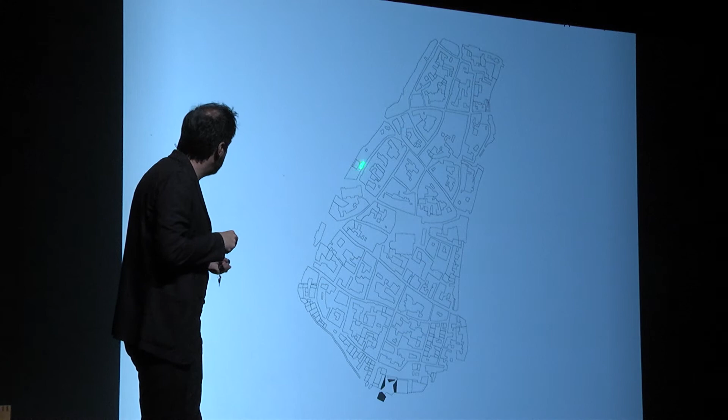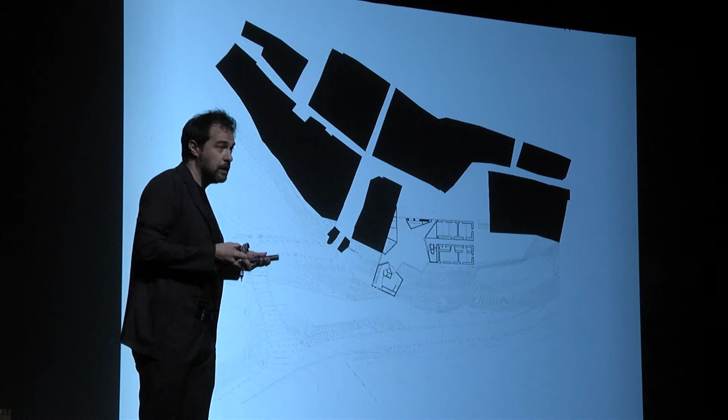The project is placed in a small town, just at the limit of the urban area. In a way, this specific geographical condition has marked the project. The project is an interpretation of this condition, a singularization of this duality. From one side, the project starts to recompose and finish the urban tissue, and from the other side, as we will see, it tries to establish the limit of the urban in front of the natural landscape. So this duality that came from a geographical condition has marked the design of the project.

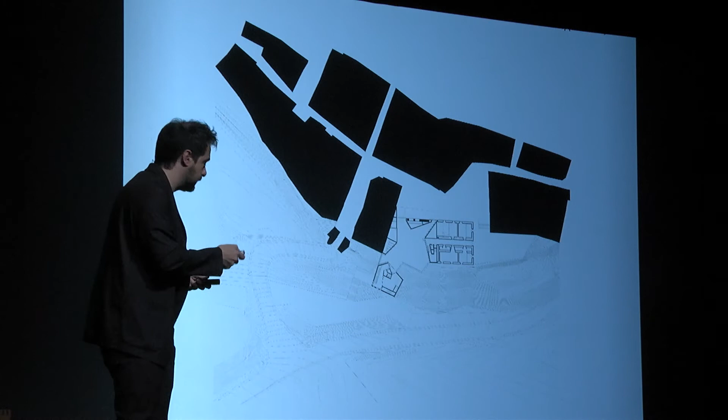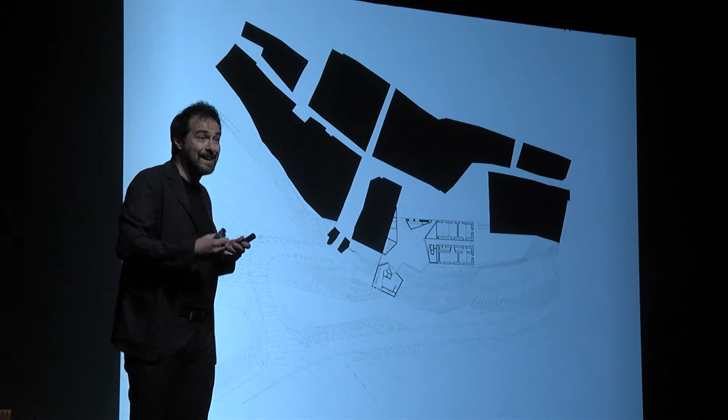From one side, with this small element, it's something very sensible to the context, and from the other side, with this archetypical element that we will see is a tower, it tries to establish another type of relationship with the landscape. So when we see the project from a distance, it is just an archetypical tower that, as I say, marks the finish and establishes a clear limit between the urban and the natural landscape.

It is an autonomous element. You have to imagine that this landscape is an old landscape, very flat, a natural landscape where small towns appear with medieval towers and so on.

And so, but if we go closer to the building, we start to discover that, in a way, the tower is not alone. It's not just an independent object placed there, but it's raised from the pre-existing element that hosted these offices for this company before.

There is a very small link with the pre-existing. And if we continue, we start to see how the building wants to be specific for this place, but at the same time it is something more autonomous. This image, for me, is quite relevant and important, because it's a visual translation of this contradiction, this dichotomy I mentioned before. On one side, the building is something autonomous, independent, conforming to its own internal rule, but it arose from the pre-existing one in a way.

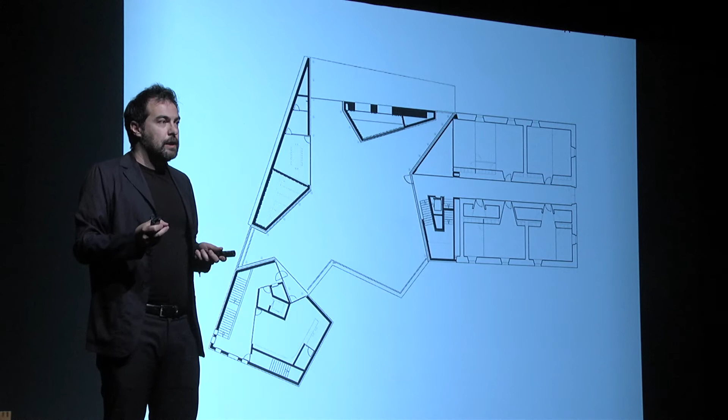So it starts to be specific for this site. In a way, it starts with this joint. It creates here a plaza, a platform, and then it became more and more independent. The tower contained the most important, more representative program, and the basement holds the other offices and so on. But what is also very important in this project, and also in the other project we will see, is that all our projects started with a reflection about public space.

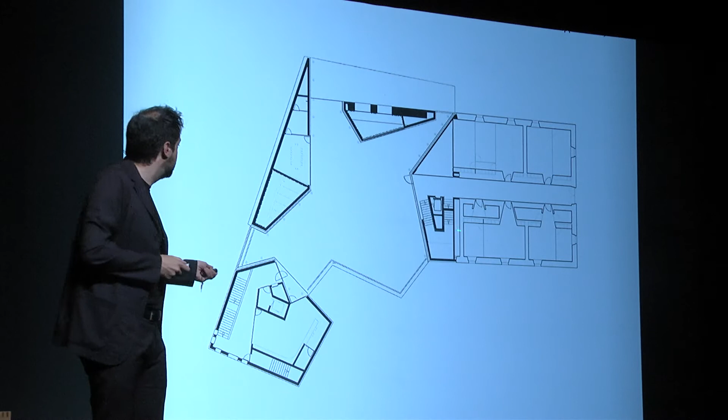Here, for example, this drawing represents the main level of the building. In the middle of the project, there isn't a building, but there is a plaza. In the middle of a private building, there is a public plaza. So in a way, the architecture is just the frame of the urban.

And this image that represents this plaza is, for us, like a manifesto. What is important here is not the architecture in itself, but what happens in between the architecture. This central void, this public void in the middle of the architecture, gives meaning to the building. It's a private building, but it's able to return something to the city. So in a way, in this project, and others of ours, the architecture is just the frame of the public space. And we try to work in a very essential way.

Here, for example, there is just one material, the stone, that covers the entire building - the floor, the walls, the roof - and we try to create something more monolithic, something also primitive or basic or archaic in a way. And in this plaza we also try to establish a kind of balance between a more intimate space here and the openness of the landscape.

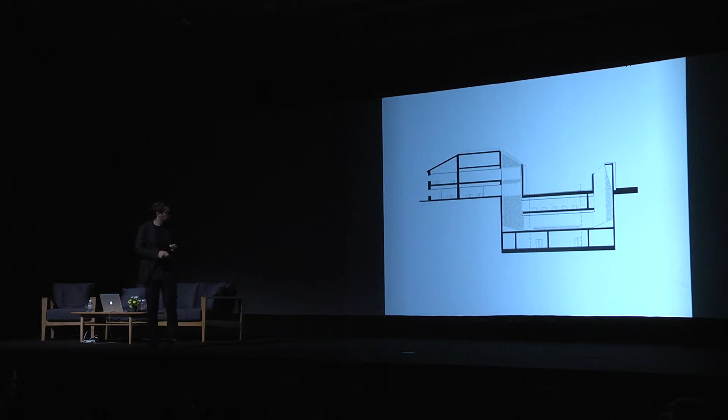So every project has a small secret in a way. We try to focus our attention on how to create public space, and discover how to organize the program in order to have the possibility to create that public space. This is an image of the lower auditorium with this big skylight.

We spend a lot of time discovering which type of materiality the project should have in order to establish this intimate relationship with the context. Here, for example, the building is in stone, the same local stone of the previous building, in order to give continuity to something, and transmit the same gravity, the same solidity of the original building.

You have to imagine that with the passing of the years, the building will transform, and step by step it will be more linked with the original one. Here it's important to notice that this facade is not built with a ventilated facade, but we forced our client to conform the building with a real stone facade in order to transmit the same gravity or mass as the original one.

And speaking about the materiality means also speaking about time, discovering how the building could transform over the years. So it's a way to control or reflect about what time means in architecture.

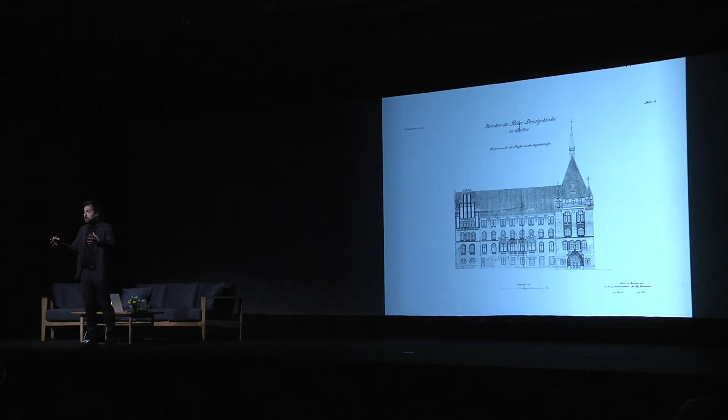When I speak about specificity, I want to say that it means discovering how to learn from what exists. This drawing reveals to us what are probably the main identitarian elements of this type of architecture. These drawings speak about mass, speak about verticality, speak about repetition, in a way.

So starting from there, we tried to reinterpret it through an autonomous thinking, because reflecting about specificity means nothing if you don't filter it through your own interpretation. The result of this interpretation is this model, our proposal - a building still speaking about verticality, repetition, mass, order, composition, all the elements that from our point of view were identitarian for this context.

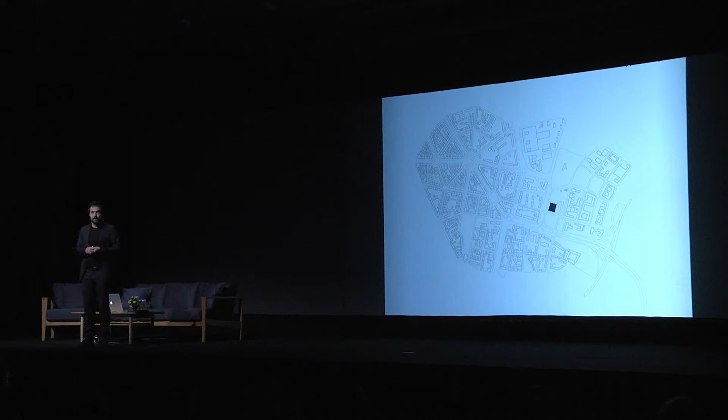The Philharmonic is the first step of a bigger urban renovation of a quarter that is now quite depressed. From an urban point of view, the building just tried to fix a corner, create an urban corner inside a quarter that's quite fragmented.

In this case, the project fulfills the entire site, and the result of our reflection is this image. I can say that all the elements that were in this building, our neighborhood, are transformed and converted into something new in the new project.

The project tries to reflect something like a stark monumental element, very simple, where the only expressive element is conformed by the roof - this very steep roof that conforms the landscape of the city, in a way informs the project too.

But when you design a project, there are many things that happen in your mind. We also tried to establish a kind of relationship with this expressionist condition that's still present in this area. So without any type of nostalgia, we modified the material of the building to give independence to the new project in front of the existing building.

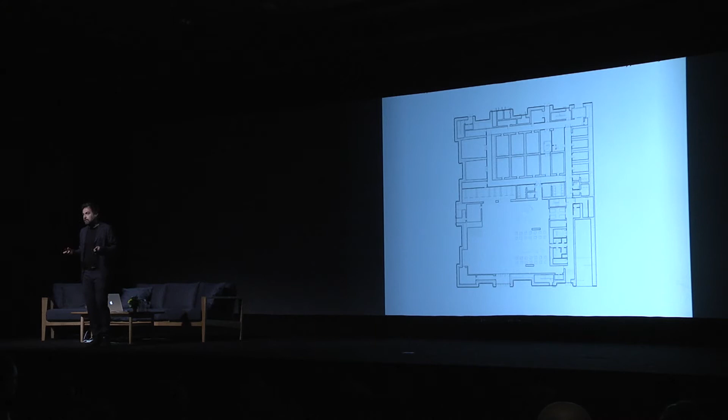Basically, it is conceived like an inner plaza, an inner public plaza. In this case, the relationship with the public space is not outside of the building, but it became inside. This space is conformed by the natural light coming from the skylight, by the shape of the two concert halls, and from the vertical connection element of the stairs.

So in a way, this foyer is a public plaza, because what is important is not the architecture in itself, but what can happen inside of a building. Our work as architects is to give the possibility to the citizen to use the building and transform it, and have activity inside. So in a way, at the end, the architecture is just a background where things happen. And this gives meaning to our work and to the architecture.

So in this project, like the other project, we try to solve a very complex problem with simplicity. There are the two concert halls, two boxes. Inside of this crown, which contains all the technical elements, vertical elements, etc., the interstitial space that appears in between these elements is the public space. So we try to make the project very simple, very clear, very understandable.

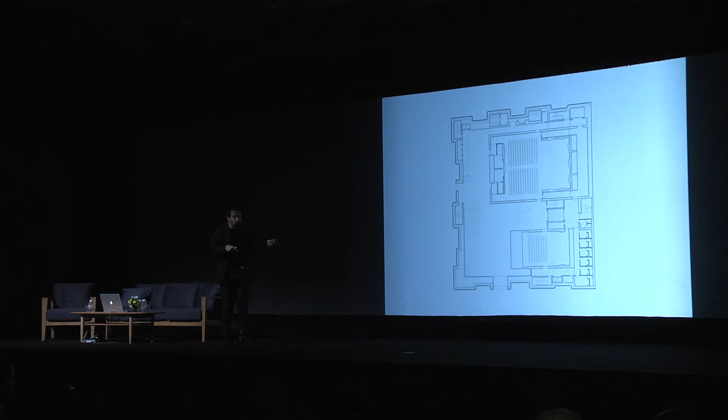And then there are several levels, and on the upper level there is an exhibition area that connects the two main systems, because inside the building there is an internal loop where people can go up here or with these stairs here, move around the building, and rejoin in this area. So it's important that a building of this dimension should be very easily understandable.

This exhibition area is suspended over the foyer here, and you have a visual connection for all the spaces. This permits the visitor to be oriented inside of the building.

But the main program of a symphonic hall is for sure the concert hall. And the challenge was how to design a contemporary concert hall for classical music. So we started to work basically with three elements: the section, light, and ornament. The section is basically a reinterpretation of a traditional, classical typology of the Eastern European concert hall. There is a very flat floor here, and this is the first step in order to transform a tradition into something new.

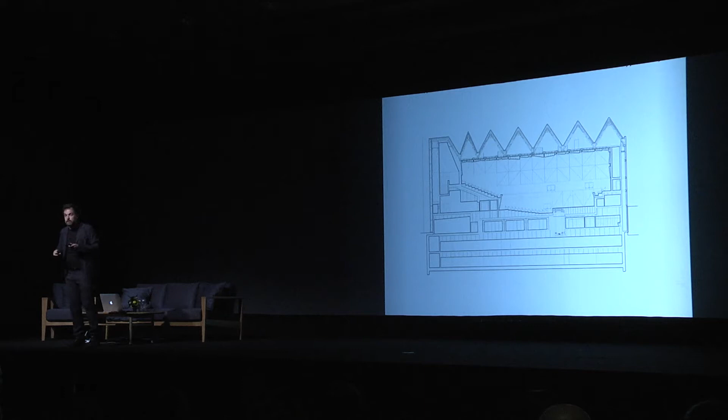But then we discovered, starting with this idea of ornamentation that conforms the classical concert hall, that probably starting with a detail like this, with an ornamental detail, we would be able to conform the entire concert hall. So basically this concert hall is conformed by a decoration or ornamentation on a large scale.

But what is really interesting is this ornamentation is not really just an ornament, because all these surfaces are made like this in order to achieve the best acoustic. They are really a very high-tech element in a way. So if we are able to join decoration with technique, the ornament is not an ornament anymore, it's another thing. In this case, we try to discover how an idea of an ornament is able to create something performative for a building.

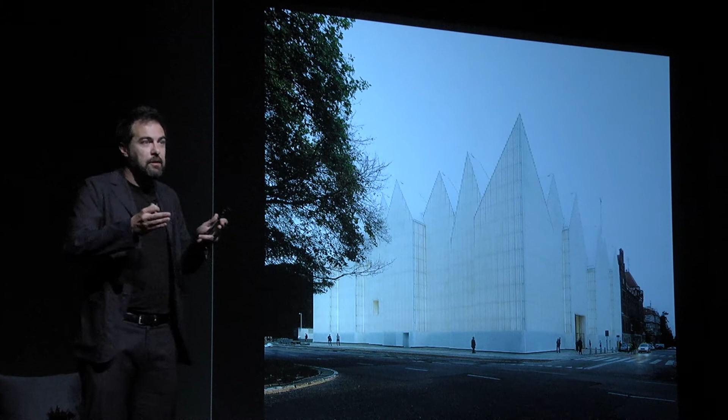And it changed radically because the light is the element that conforms the building. In a way, the building expresses that inside there are some type of activities. So the building, something that was solid and monolithic, it became something else, it changed its materiality to something lighter. During the night, at the end, only the light conforms the shape of the building. And then again, the next morning, the building became more solid again.

So in a way, the main achievement of this project was to create a building able to establish some type of relationship with this very fragmented context in which it's placed. In this image, probably you can start to feel how the building is related with the other elements that appear in this part. But at the end, the great success of this building is not the architecture in itself, but fortunately this building has been very well received by the citizens there, and now it is really a new social cornerstone of this city. And for a public building, that's the main goal, I think, in a way.

Recently, last summer, we finalized a fine art museum in Switzerland, in Chur. Chur is a small town close to Zurich. The project is an extension of an old building, and this image represents the actual museum. It's a building quite weird, a little bizarre, but very interesting in a way. It is a neo-Palladian building built in the 19th century. It's influenced by the Rotonda, by Palladio, but there is also a strange oriental ornament that appears here or there.

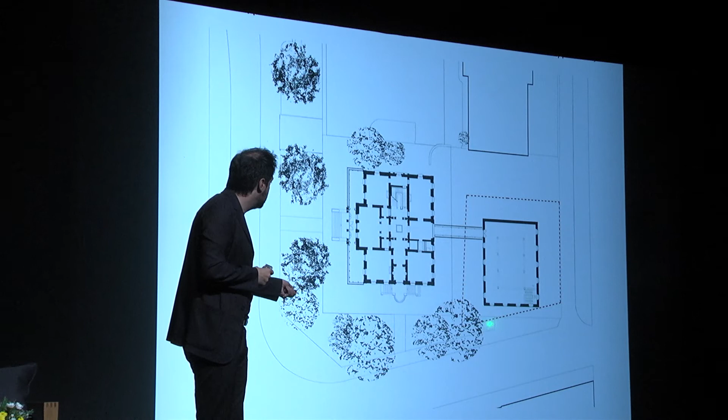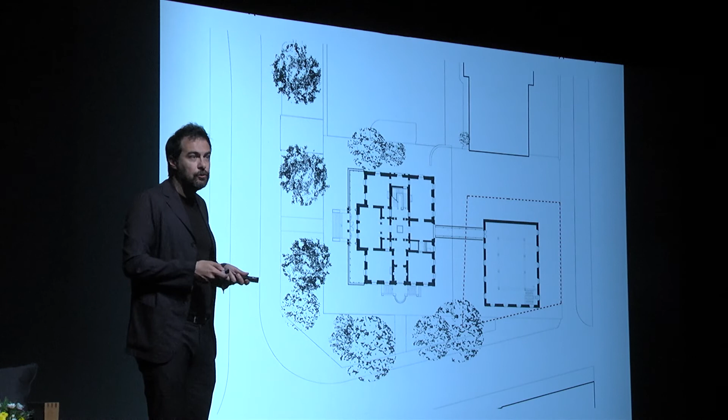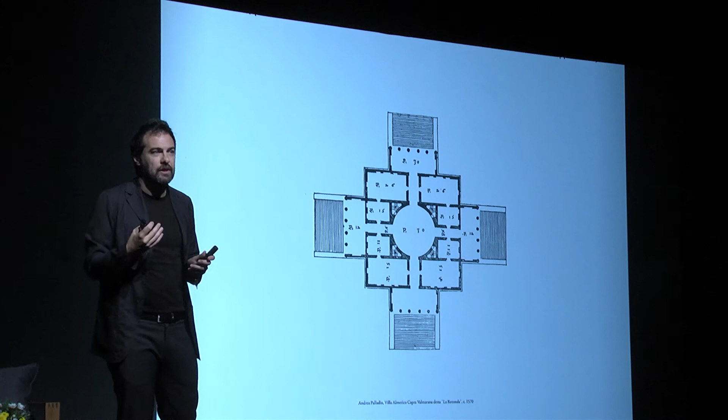The competition that we won was very, very complex because they asked us to place a very big program inside this site. Here you can see the conformation of the historical building based on La Rotonda. The condition of the original building was very important for us. This idea, the Rotonda by Palladio, this idea of an absolute building, was important for us in order to discover how to create the new building.

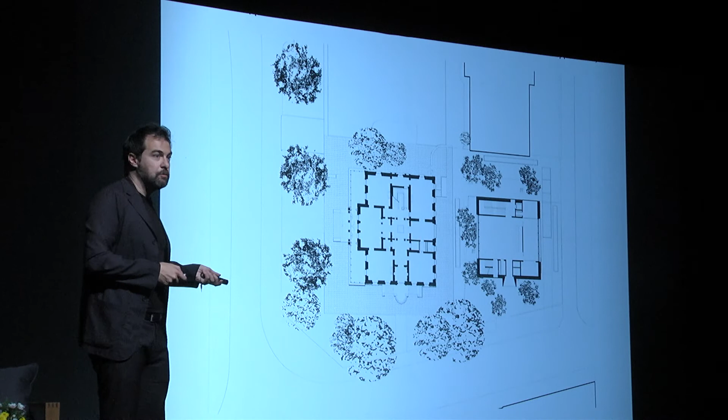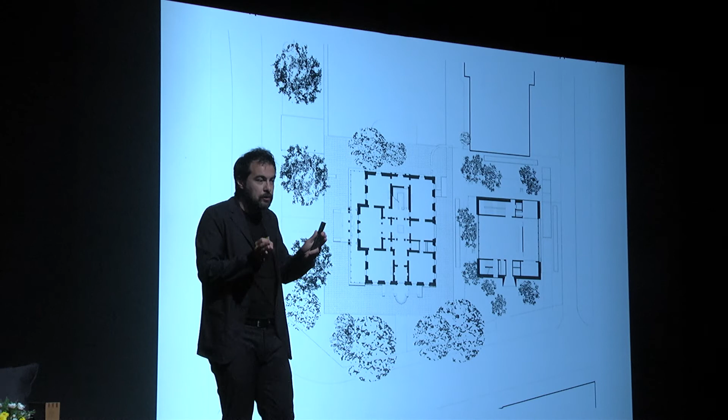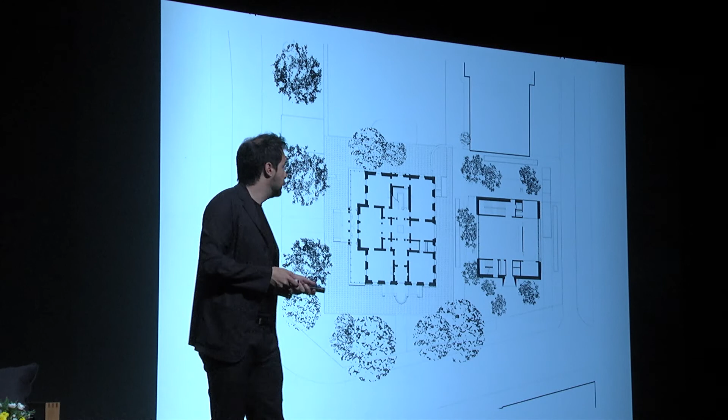So what we did was very, very simple. We just extracted the axes from there, imported them to the other building, and tried to make a very simple project, super simple, very small, in order to also use the garden around the building, and try to make the garden also around here, in order to use the garden as a link between the two buildings.

So in a way, what we try to do is create a diptych, in a way. This is a painting by Piero della Francesca where in the same painting there are two faces - one is the man and the other is the woman. Each one has its own personality, its own autonomy, it's something independent, but both together they conform another element in a way.

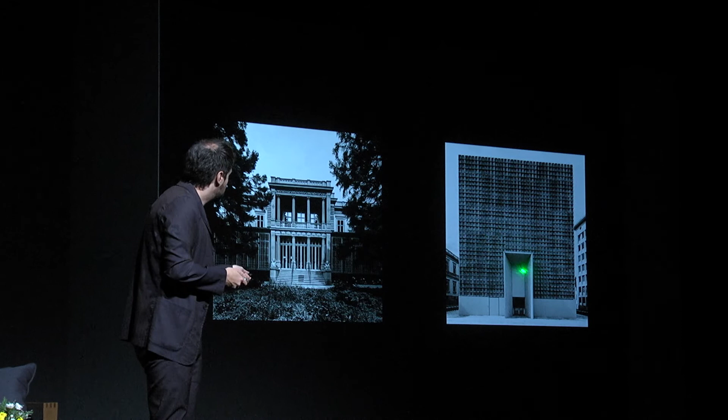So what we try to do is exactly the same. We try to create, in a way, a diptych. The same identitary elements that appear in the original building are transformed into the new addition, in a way. Each one is an autonomous building, but each one is conformed with the same conceptual elements. And again, the building, in a way, is something super specific for this condition, but it preserves its autonomy, as I said at the beginning of the lecture.

And which are these elements? I can say that our project, in a way, is a neo-Palladian building, because as we see, the plan is conformed by a repetition, a very regular sequence of rooms, in a way. It's conformed by a double symmetry, that comes from the original building.

There is this kind of bas relief that conforms the facade, creating an ornamentation, and it tries to create a subtle link with the decoration that conforms the original building. So for this reason, I can see that the same conceptual elements of the original one are conforming also the new project.

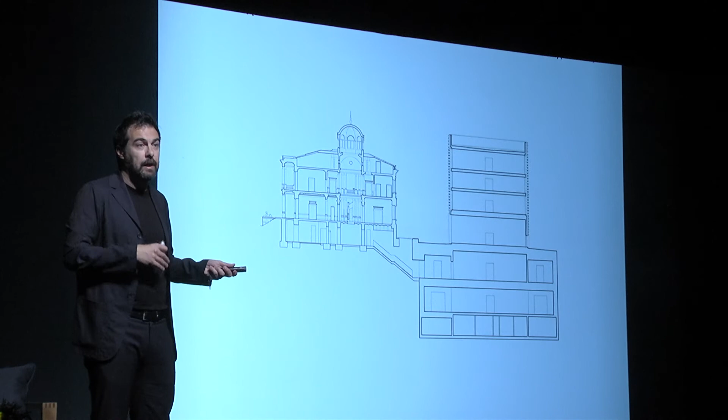In order to conform this public space, we took a very radical decision. We placed all the exhibition area underground, and we let only the public function use the outside area. In this way we were able to reduce the size of the building, reduce the footprint, and give importance to the public area. The connection with the historical building, with the exhibition area made by Peter Zumthor, happens here with these stairs.

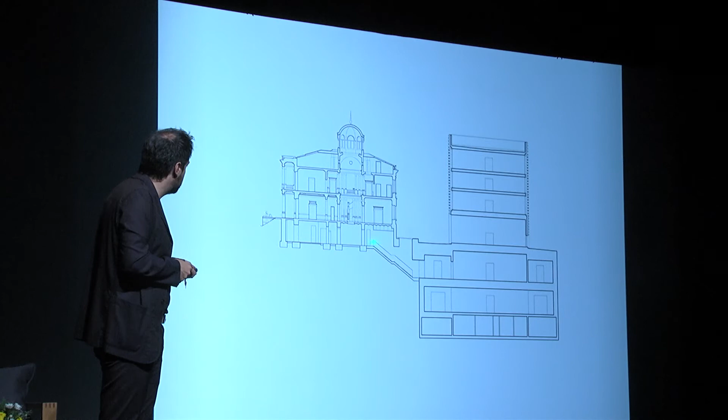So the foyer is again a public area, and the relationship with the historical building is quite evident. The facade of the historical building is the facade of the new building.

What is also important to know is that this area is the foyer, but at the same time it is the delivery area, because a truck can enter here. And for the art, there is a big elevator here. So we tried to combine the program in order to compact the building to the maximum.

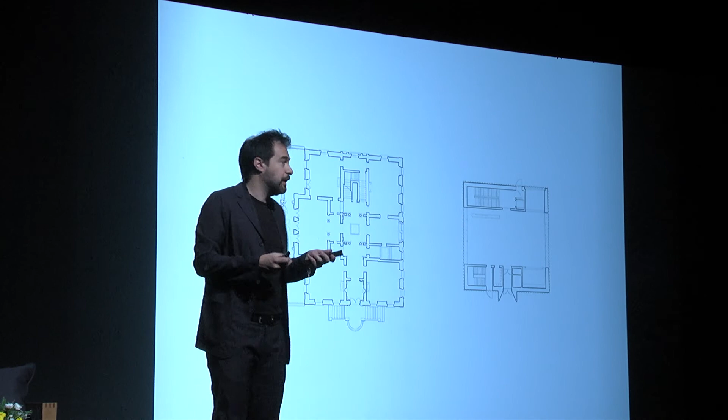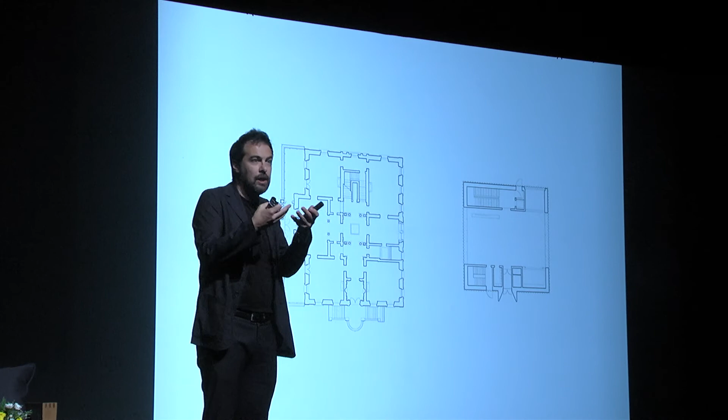This simple drawing, which I personally love, is I think one of the most synthetic, basic, elementary drawings we did, because everything is here. The building is composed just by the structure. The structure contains the core, contains the elevation. The composition of the building and the structure are the same thing. So it expresses our effort to be synthetic, in a way.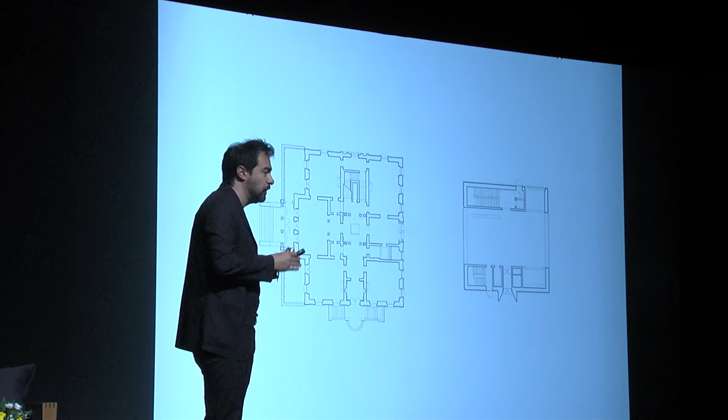This plan and this plan are balancing, in a way. There are these stairs, this element, the portal hill. Everything is simple but quite clear. Here, this is the stairs that go down. This is the first floor underground. The museum is in concrete.

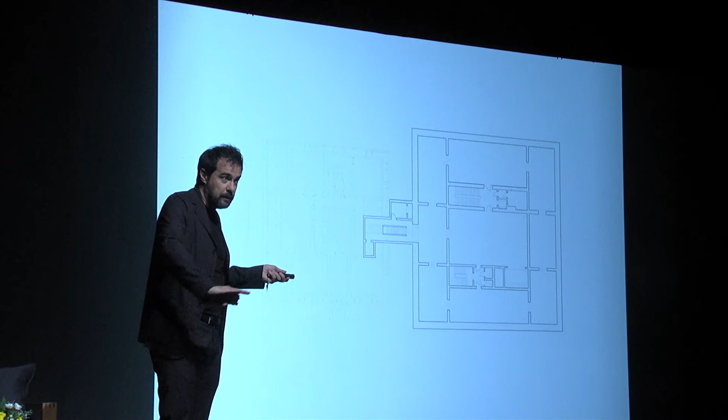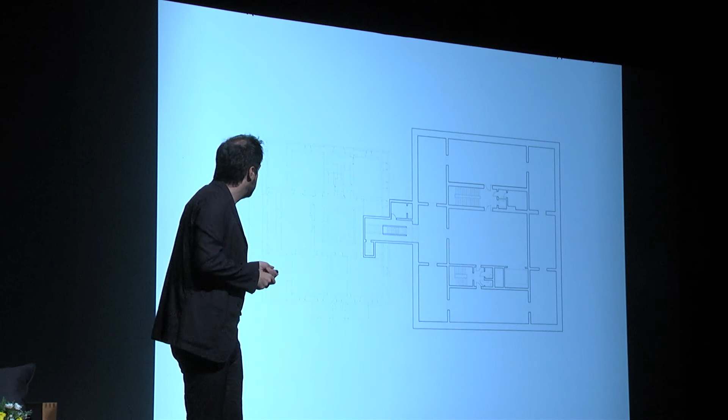And here is the plan of the first floor. You see that basically it's composed of a sequence of rooms, in a Palladian way. And there is a loop to visit the exhibition here. These are some images of this museum, which is basically devoted to contemporary art. This is the connection to the other building.

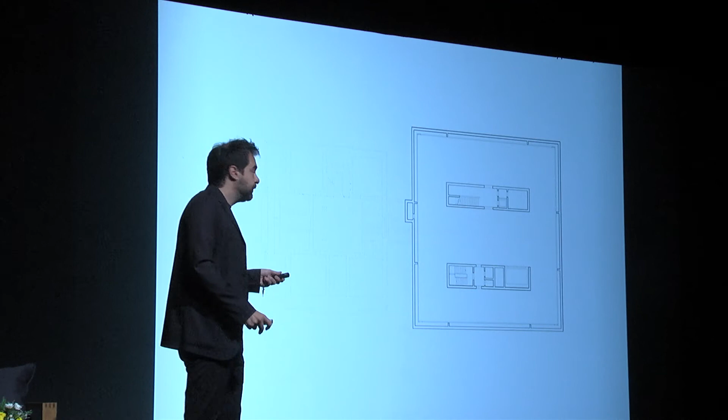But in the second floor, again, you see how a complex program is solved in a very simple way. There are just the two cores. This space is for temporary exhibition, very open, and that's it, there's no more. But the precise position of the core of the structure permits conforming the entire program with simplicity.

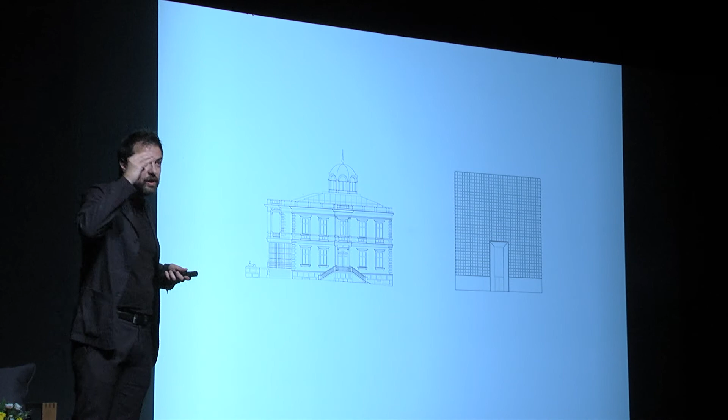This is, I think, an important achievement of this museum, impossible to tell you just with the image: when you visit the museum and go down 20 meters underground, you don't feel that you are underground, because of the proportion of the space, the dimension, the central circulation. I think this was the most risky part of the project, but if some of you have the opportunity to visit the building, I think it's an important achievement.

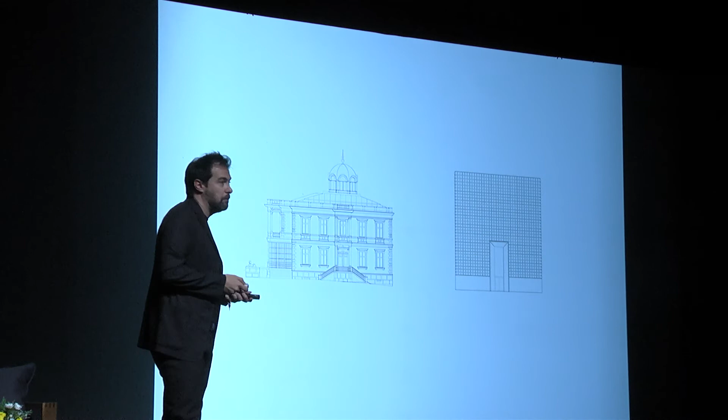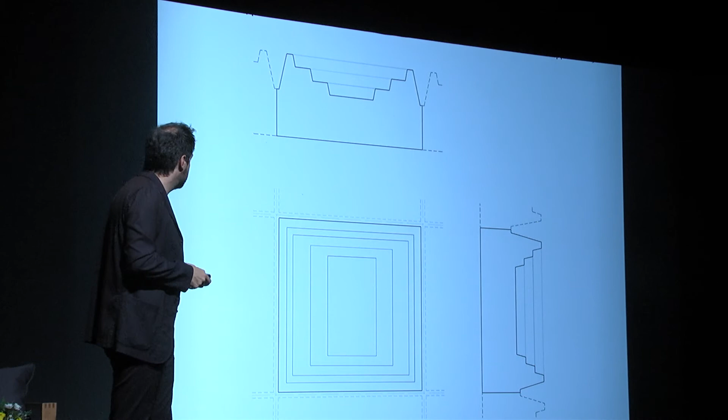So we also, the materiality of the building is absolutely important. The facade is composed by a sequence of this element in concrete. There are prefab concrete elements that conform the entire facade.

But you have to notice that when I say that for us it's important to discover how to work with specificity, it's not only to reflect about the form, but it's also important to discover how you can work in a different context.

For example, the Philharmonic in Szczecin is basically a handcrafted element, because in Poland there was a tradition, there still is a tradition, able to conform this handmade element. So the concert hall is basically a handmade element.

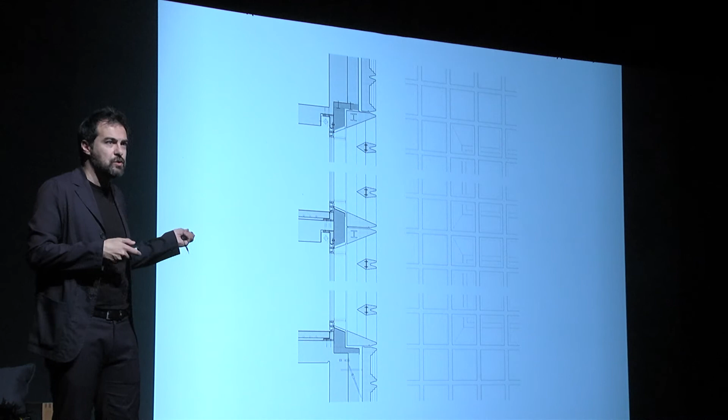But here in Switzerland, there is high technology with concrete, with prefab concrete, that permits us to achieve this type of facade, where with the concrete we are able to make edges with only 1 centimeter. So it is important also to interpret how you can work in different conditions.

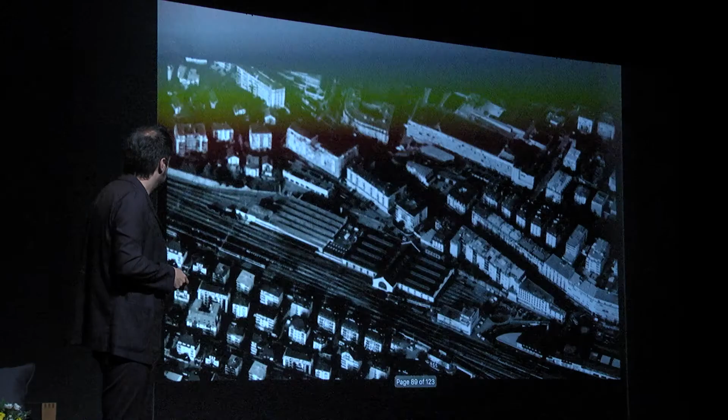Now, actually, we are working also in another museum in Lausanne, again in Switzerland. This project is very different from the other one. The site is very huge, it's all this area, close to the railways here.

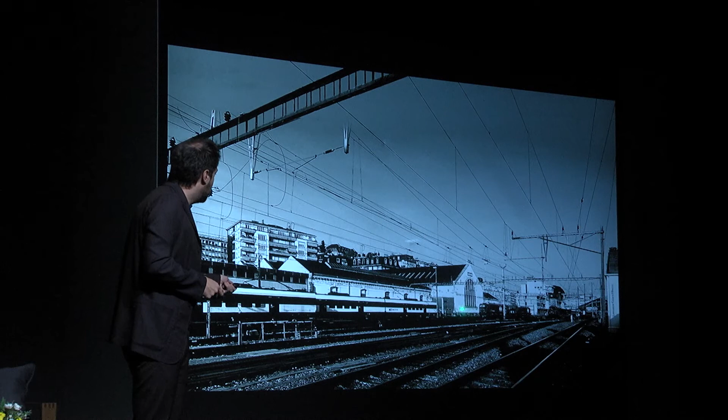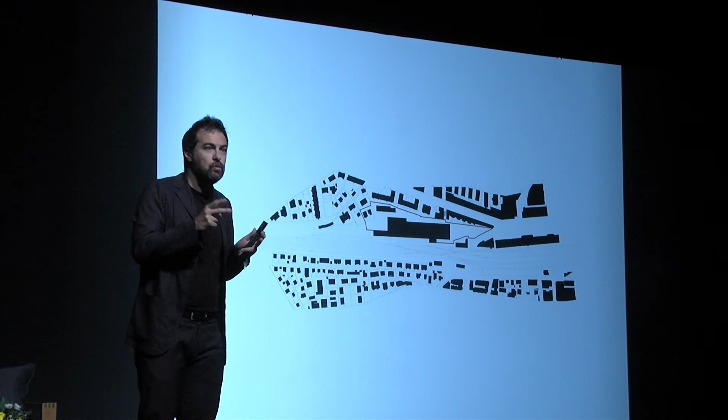We spent during the competition a lot of time discovering how to transform again the historical building into a new museum. But at the end, after a few months, we discovered that probably in this case, this strategy was not so good.

We start to discover that, again, before thinking in architecture, it was important to discover an urban strategy able to create public space. So we start thinking that probably what was important in this project was to combine urban and architecture.

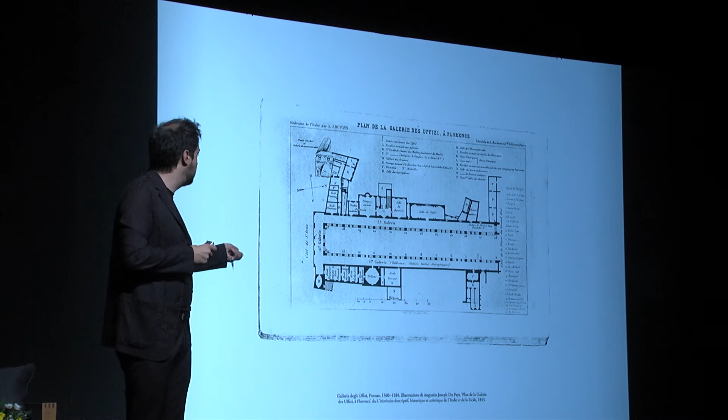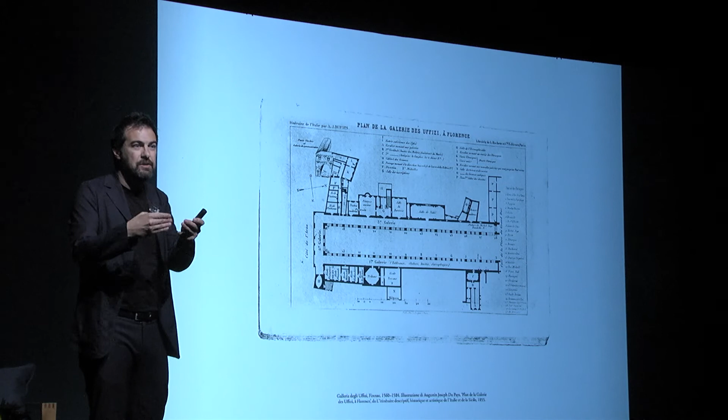Like, for example, in the Uffizi. This is a plan of the Uffizi Museum in Florence, where the architecture and the urban and the plaza in the middle are the same. There is no difference between architecture and urban.

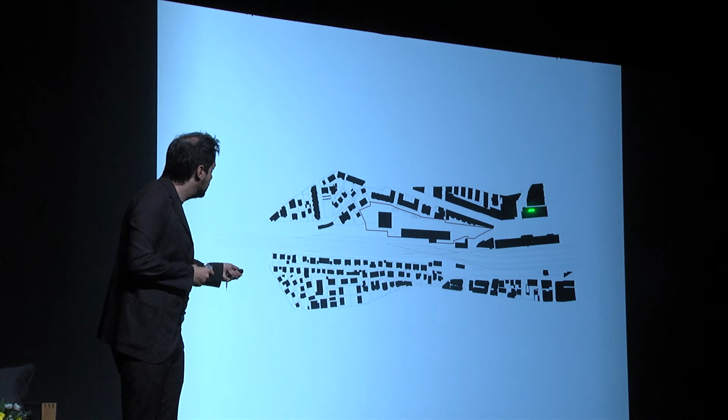So we took a very radical, sober, but at the same time radical decision. We decided to demolish a big part of the original building in order to create this new big plaza, able to connect this area with the plaza in front of the rail station, and in this way try to conform this new site linked with the city.

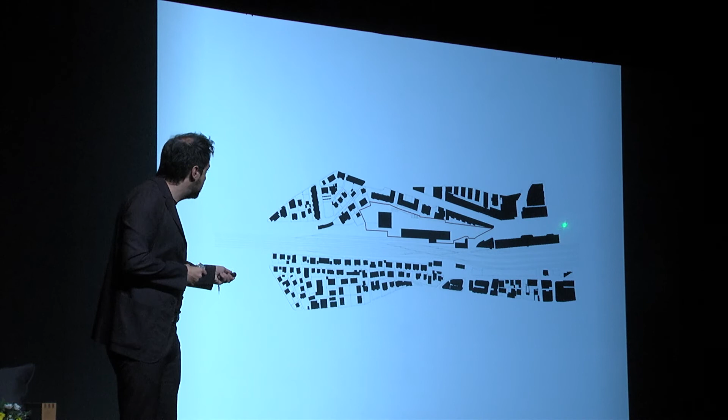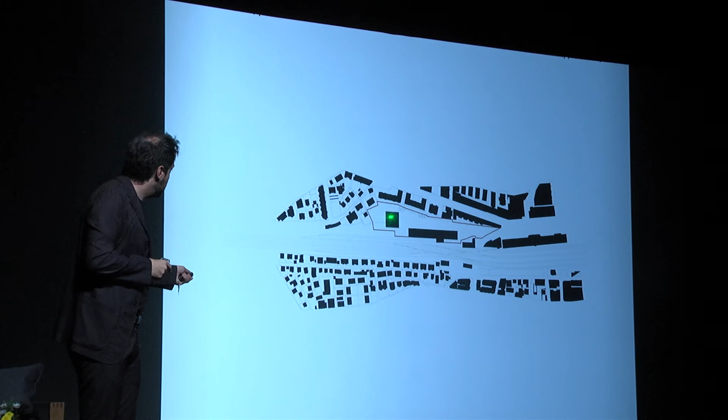Because in this project it was about creating a new fine art museum, a new museum for photography, and a new design museum. So now the two other museums are condensed here in one only building. But what's important in this project was, again, this public area.

So our intention would be to try first to create a public space and then discover which kind of architecture is important for this site. So what is important here is, again, this public space.

Able to, and the architecture, the three museums, again, are the frame of the urban space: the Fine Art Museum, Design Museum, and the Photography Museum.

And then the building is again specific for this condition. This area is an industrial area in the center of the city, linked with the train station. So the new museum is basically like a kind of industrial building. It's a building very abstract, very rigorous, very simple in a way.

So when we, after discovering this urban strategy, the architecture arrived very, very easily, in a way. So it's something. The building is something massive, it's something solid. It tries to reinterpret this industrial condition that still exists in this area.

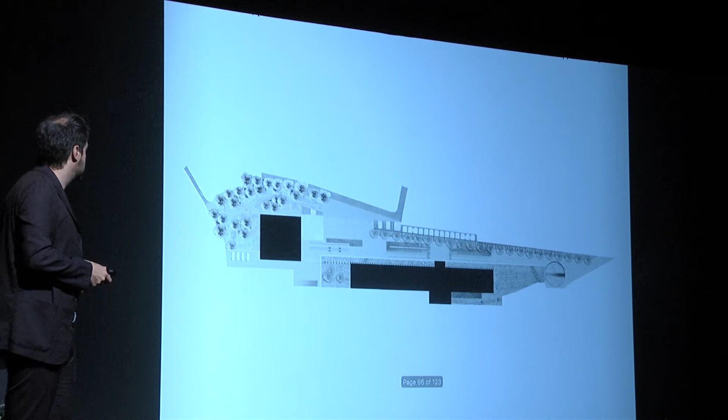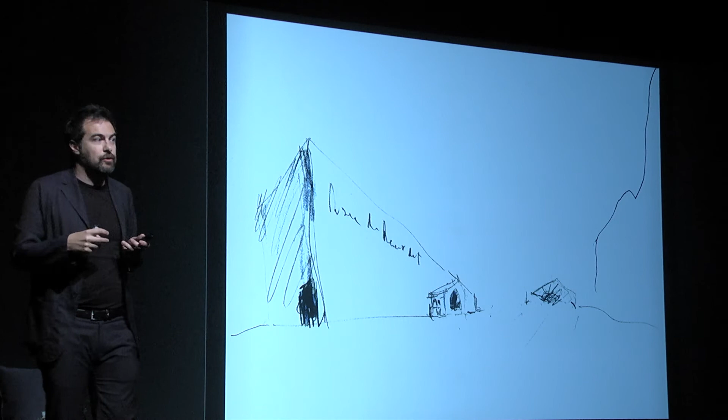So this is the general drawing of the master plan. But in order to create the urban space, we decided to demolish something. Then the question was how to preserve the memory of a place if you demolish something.

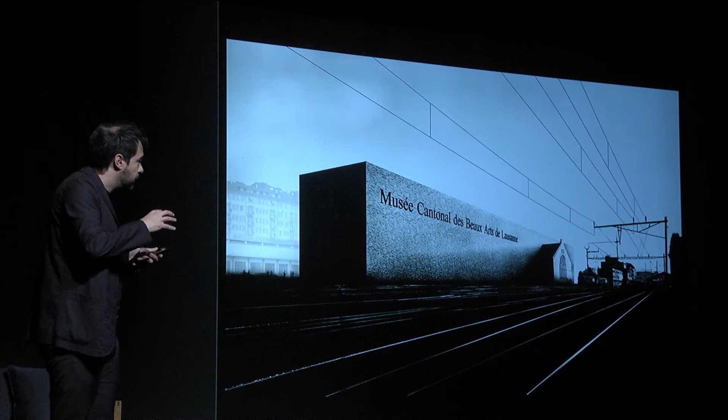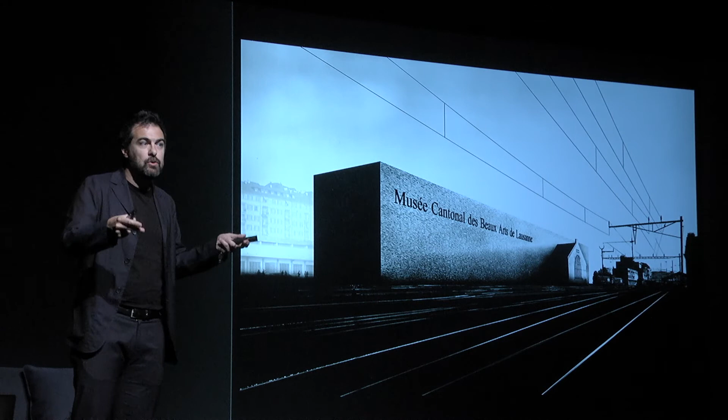So we started thinking that probably we were able to preserve the identity and memory of a place through a constellation of fragments. So we decided to preserve a small element of the pre-existing building, and transform this small element into the main compositive element of the new museum.

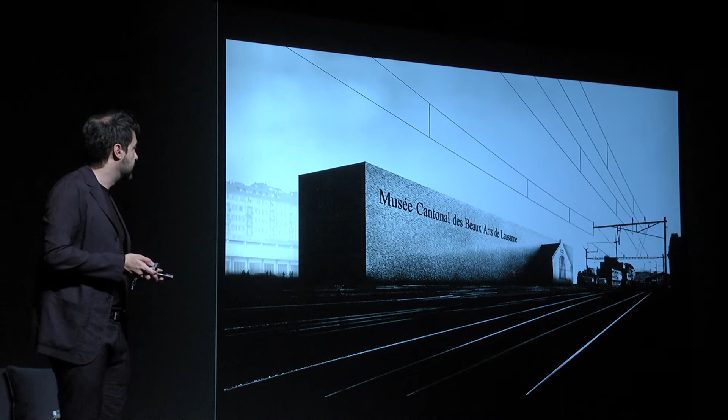This museum is conformed by a classical sequence of elements. There is a background, a neutral background, in front of a figure that is this small element. So in a way, the project still became something from the original building.

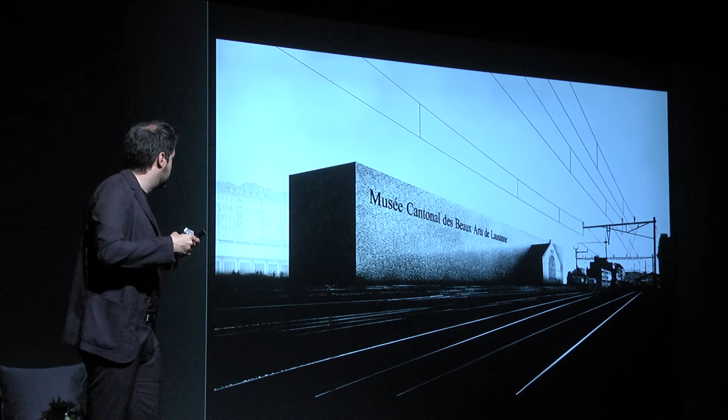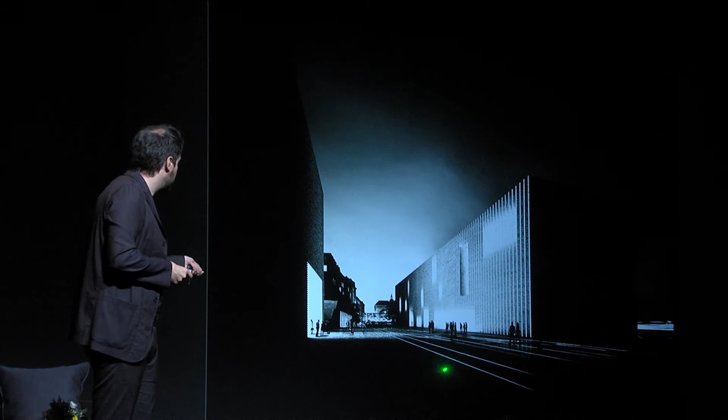From one side, the museum is very closed, very closed, in order to protect the art from the train here. And from the other side, the museum is very open, very permeable, in order to create life in this public space.

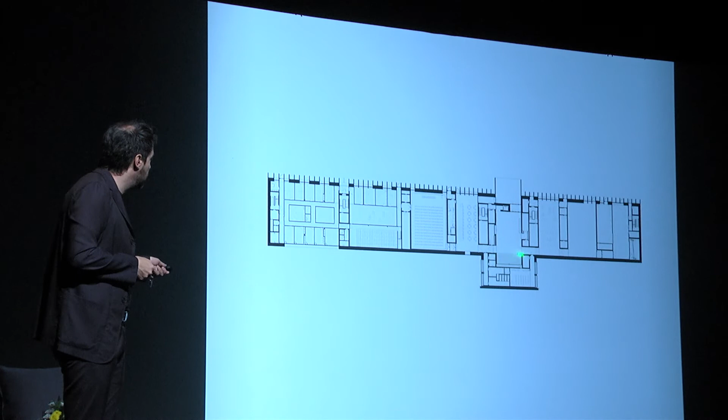So the museum is basically an inhabited wall. In the ground floor there are all the main public spaces, and this small pre-existing element is not something irrelevant, but the crucial element of the new museum, because here there is the new foyer exactly in the axis of this fragment.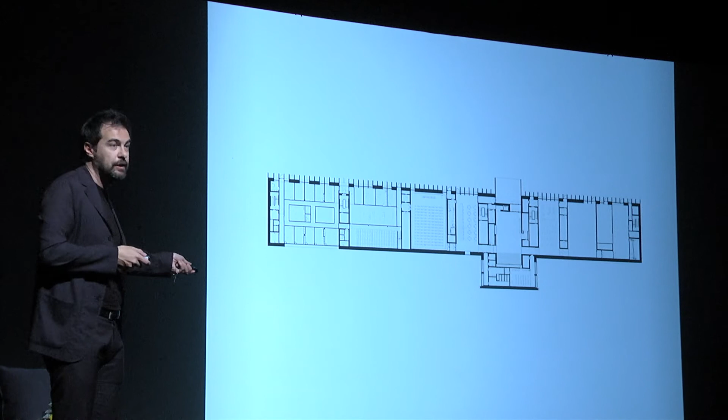So what we saw before, this very beautiful arch window that for us was the most beautiful or emotional element of the pre-existing building, is transformed into something new, and it is the main element of the new foyer. Then the stairs go up, and here is the second floor.

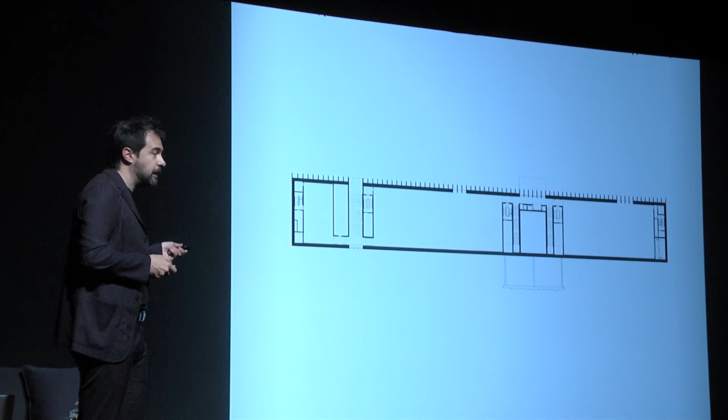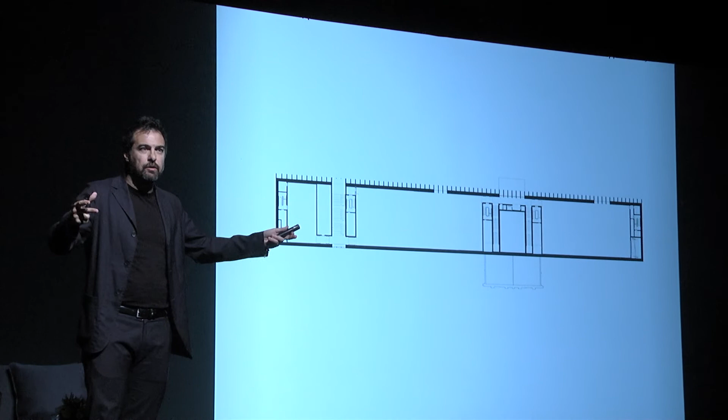Like in Chur or like in Stettin, you can feel how a very big museum — this museum is about 18,000 square meters — is solved with 5 elements. There are basically 5 cores here that divide the program and conform the main structure of the building. So again, we fight in order to condense everything into very few elements.

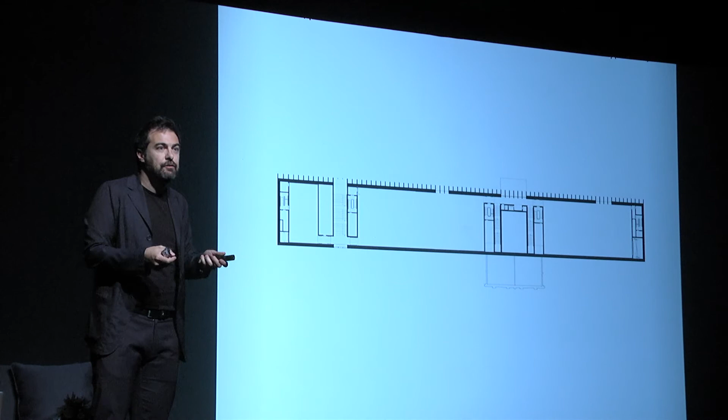And I think that this drawing represents quite well our intention. And then there is the second floor, conformed by natural light, and there is a very special ceiling — but maybe that's for another presentation.

And then the last project I present to you is a different project from the others, because last year we had the opportunity to design a house. For us it was quite unusual, because during these years we designed basically public buildings.

So for us it was also a different project, because for the first time we were designing something in a very natural landscape. In this landscape there are no pre-existing buildings, no small village, nothing — just a very beautiful landscape. How to design the house there.

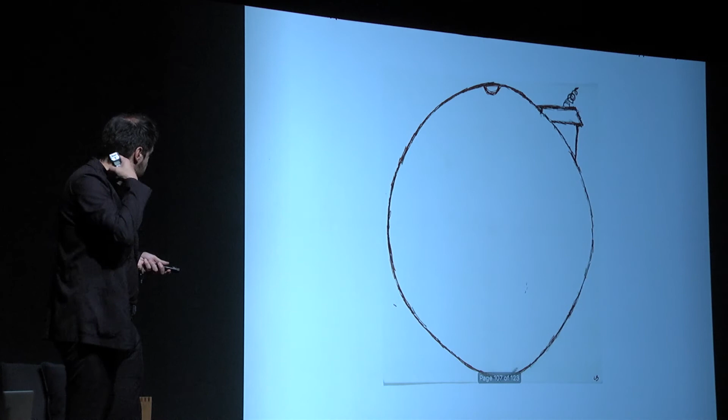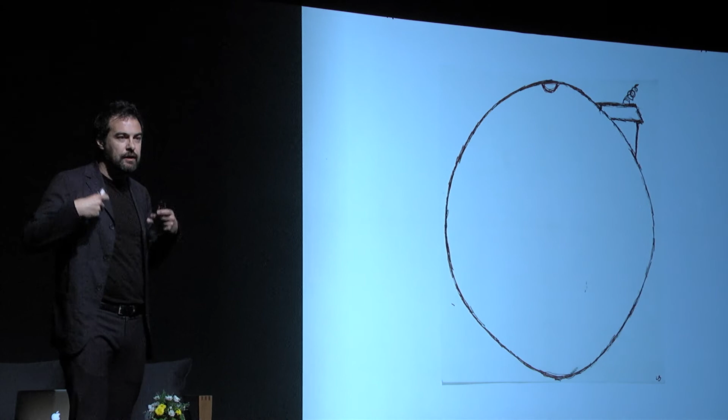Louise Bourgeois reminds us that our effort in thinking and design rises from our very primal, very intimate intention. So what was our main intention, very important for us? For this project, what's important, as I said, is not the object in itself, but what happens in between different objects.

So in this case, we thought it was more important for us to try to create a place than just to create an object. So we decided to place the house — I have to say, also, this is not a house, it's a weekend house.

It's just like a small refuge to spend 1 or 2 days isolated, just to relax. It's not a house for living day by day, and this is important also in order to discover the project. So we decided to place the house on top of a hill, because our land was very, very big, and we had to decide where to place the house.

We started to place some very simple pavilions on top of this hill. The house is composed basically of 4 pavilions, each one dedicated to one function. And in the middle, in between these pavilions, is where the life appears, because this house is for summer, for spending some days, and for living basically outside.

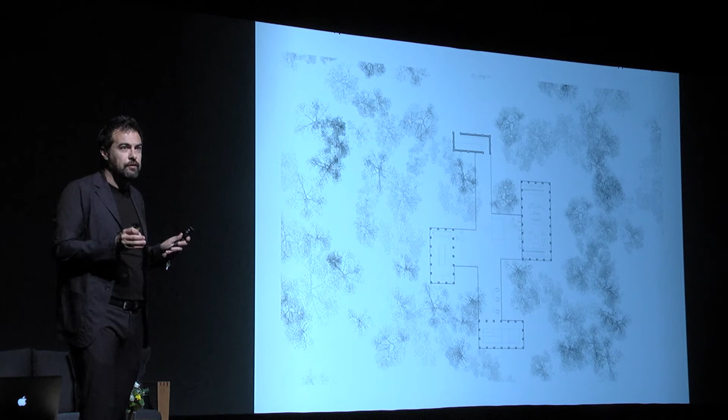The house is placed in an area south of Barcelona, an area where also in summer it's very, very warm. So the plan of the house is again very schematic, very simple: there's an entrance pavilion here, the house with the living room, an exterior area here, and the swimming pool.

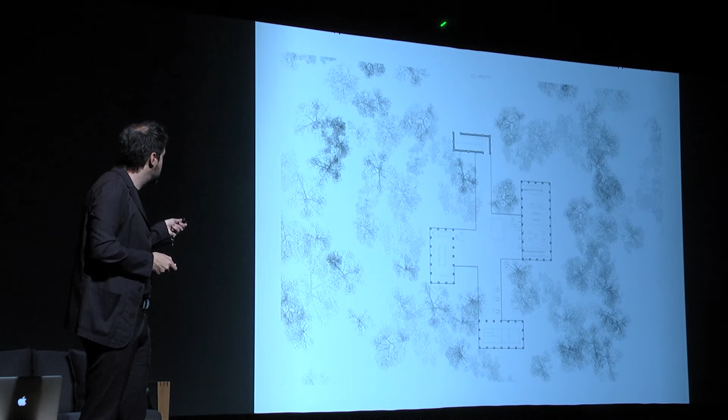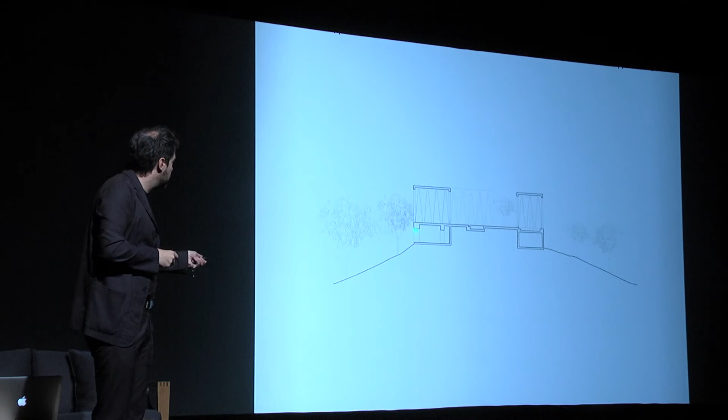There is a platform here that links these four pavilions, and the entrance to the house is from there. So we start to artificialize the nature. We place this plinth here in order to make the platform horizontal, and we place the pavilion over this artificial plinth.

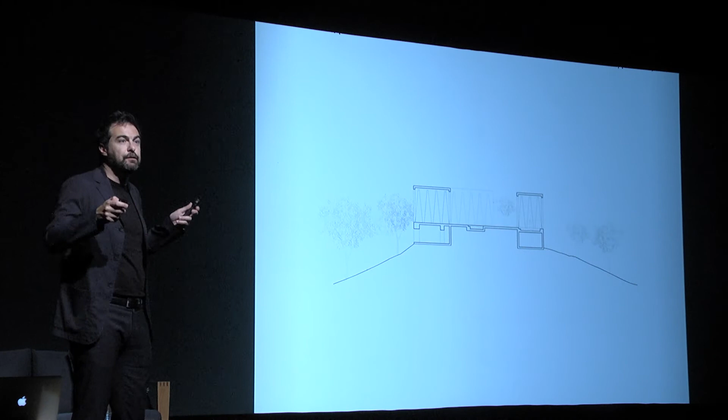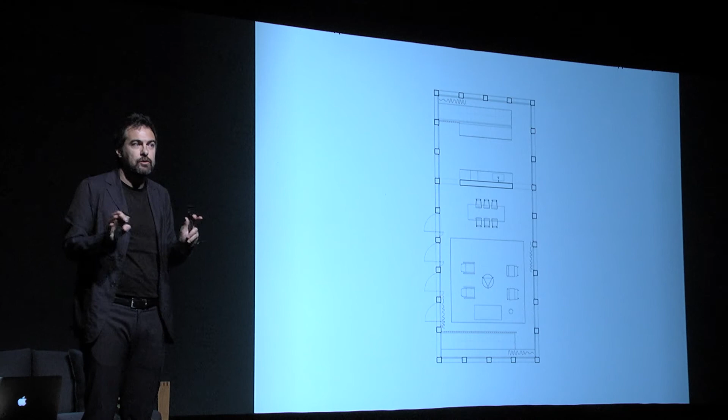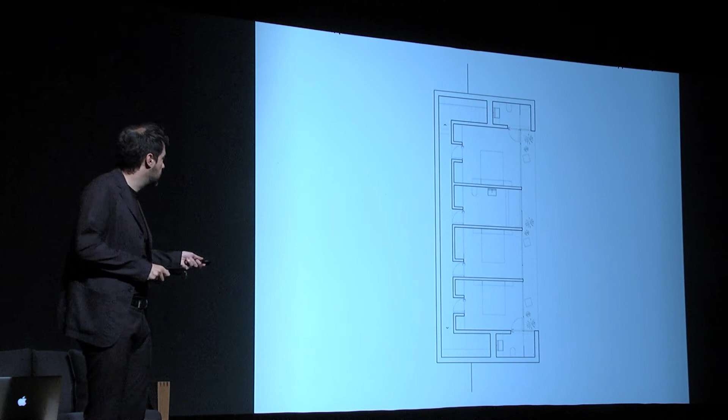The house is basically just a shelter, something able to protect you, no more than this. This is the first floor: the living room, the kitchen. There are two stairs, then a corridor, and in the second, into the plinth, there is the most intimate part of the house, with some rooms open to the valley.

What we try to define is create an experience, as the client was asking. So we try to create an experience for living there in relationship with nature. You have to leave the car very far away, take a path into the wood, and arrive here. You discover that there exists a small pavilion, an empty pavilion.

You enter there, there is water here that refreshes you, you can feel the freshness of the water, and then you cross this entry pavilion, enter, and discover your microcosm in a way.

The house is not an object, the space is something. What we are interested in is what type of relationship the people who will live there will establish with the surrounding nature. There is the platform, the four pavilions, and as I said before, for us it was more important than the architecture to create a place, your own place.